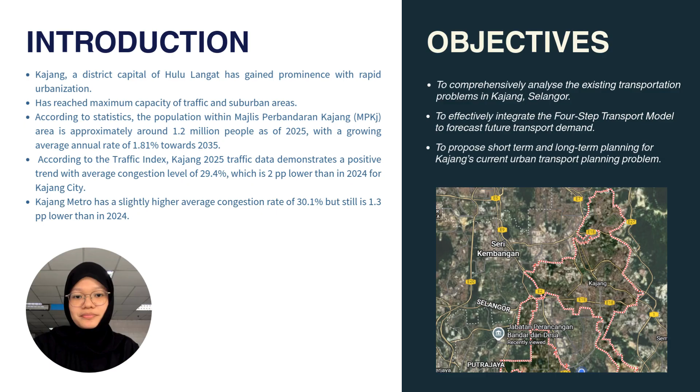There is a lot of public transport infrastructure provided in Kajang, one being the well-known MRT Kajang line, MRT Kajang Stadium. There are also KTM Kajang, Kajang Bus Terminal, and Rapid KL On Demand. There are also MRT feeder buses provided, which are T451, T461, T462, and T463. Currently, Kajang has 4 major expressways that handle both traffic from Kuala Lumpur to Seremban and local dispersal, which are Kajang SILK Highway, Cheras-Kajang Expressway, LEKAS Highway, and Kajang Bypass.

The first identified problem in Kajang is traffic congestion. Kajang experiences a low level of service, especially during peak hours, particularly near the UKM main entrance. Heavy commuter traffic from Bandar Baru Bangi and Kajang town contributes to severe congestion. According to a recent study, 15 intersections in Kajang operate at LOS D to F. Traffic flow is unstable and forced, making congestion the main urban transport issue. The primary cause is closely spaced intersections with poor traffic signal coordination.

The next one is the first and last mile gap. Kajang has a poor first and last mile connection to MRT and KTM stations. Many residents, especially students, still rely on private vehicles to access stations. Unsafe and uncomfortable walking conditions, such as broken pavements, no shade, poor signage, and long walking distances discourage access. On top of that, weather conditions in Malaysia further reduce walkability. Even though feeder buses are provided, they are unreliable due to traffic congestion, making public transport less practical for daily use.

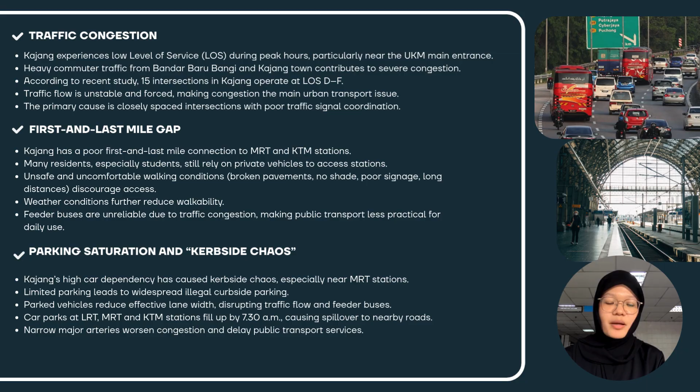The next problem is public transport fragility. The Khazanah Research Institute study shows that despite overall growth, many public transport services face declining ridership. This reflects weakening system performance, pushing commuters back toward private vehicle use. Commuters perceive public transport as functional yet vulnerable, shaped by journey experience, service reliability, and social or environmental conditions.

Frequent disruptions at KTM and MRT stations, such as delays, missing services, and poor information during interruptions, undermine user confidence. Recent KTMB service disruptions, including overhead power line failures between Salak Selatan and Serdang, have repeatedly paralyzed KTM Komuter services to Kajang.

The next one is inelastic microtransit. Rapid On-Demand faces capacity issues despite being designed to solve first and last mile access. The fare increase to RM2 in February 2026 has not reduced demand. Peak hour demand exceeds supply, making rides frequently unavailable. Students and suburban residents such as in UKM, Taman Universiti, and Sungai Ramal depend on this service due to limited bus access and high e-hailing costs. Geofencing limits prevent trips to destinations just outside the service area.

And the last one is pedestrian vulnerability and infrastructure neglect. Kajang hosts a large student population due to institutions such as UKM, GMI, and Kolej Poly-Tech MARA. Most students are non-car owners and are heavily affected by poor road and pedestrian conditions. Discontinuous or missing walkways force students to walk on road shoulders or grass near high-speed traffic.

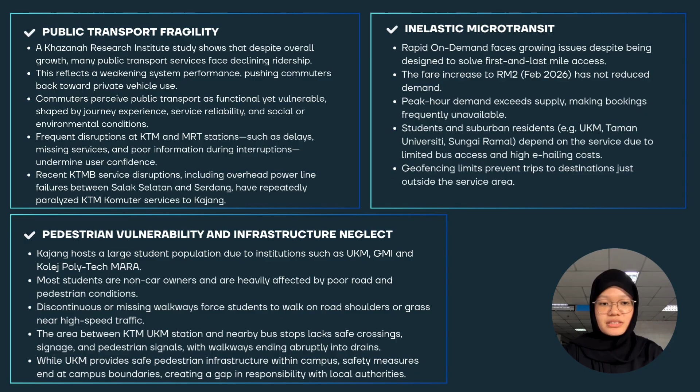The area between the KTM station and nearby bus stops lacks safe crossing signage and pedestrian signals, with walkways ending abruptly into drains. While UKM provides safe pedestrian infrastructure within campus, safety measures end at campus boundaries, creating a gap in responsibility with local authorities.

Next is the transportation plan. First, we are proposing an integrated multimodal transport system. This system will connect various transport modes like MRT, KTM, bus, and micro-mobility options to reduce travel time, ease congestion, and increase accessibility. With a unified fare system and real-time information, the system will make public transport more convenient, reducing reliance on private vehicles.

Next, public transport-oriented development (TOD) focuses on creating mixed-use development around transport hubs such as MRT and KTM stations. By concentrating residential and commercial space near transport nodes, we reduce the need for private vehicles and promote walking and cycling, fostering a more sustainable urban environment.

We are also prioritizing the promotion of non-motorized transport, encouraging walking and cycling, especially for short distance trips. This will reduce congestion, reduce emissions, and improve public health by creating safer and more accessible pedestrian and cycling space.

In line with sustainable goals, we are focusing on low-carbon transport initiatives, expanding the public transport network, promoting electric vehicles, and transitioning public transport to electric or hybrid buses to reduce emissions, improve air quality, and make Kajang greener.

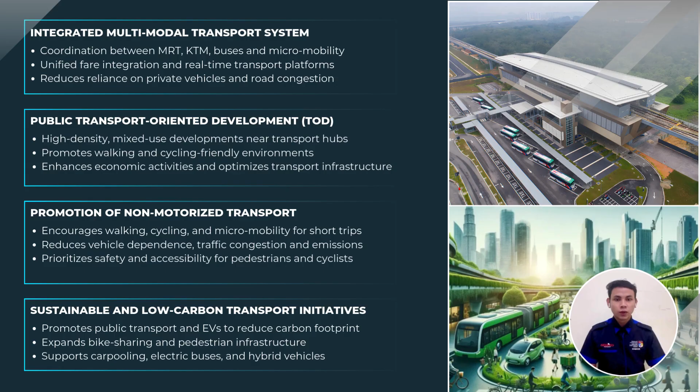Additionally, we will implement a smart and intelligent traffic management framework. Using real-time data, traffic signals will adapt to current conditions, reducing congestion and improving flow, especially during peak hours. Public transport will also be prioritized at key intersections for smoother commuting.

We will also focus on road network optimization and capacity enhancement. Upgrading intersections, expanding roads, and introducing carpooling will improve traffic flow without significant road expansion.

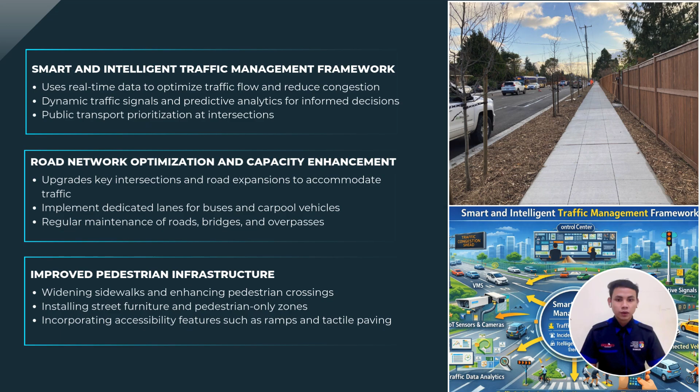Lastly, improve pedestrian infrastructure. Sidewalks will be widened, crossings made safer, and pedestrian-only zones will be introduced. Accessibility features like ramps and tactile paving will ensure Kajang is walkable for everyone.

Next is short-term planning. First, we will focus on MRT and commuter integration. To reduce waiting time and improve reliability, we will increase KTM Komuter frequency, especially during peak hours, and extend operating hours for both MRT and commuter services. We are also improving physical connections between stations and introducing a unified ticketing system, allowing commuters to use one card for both services.

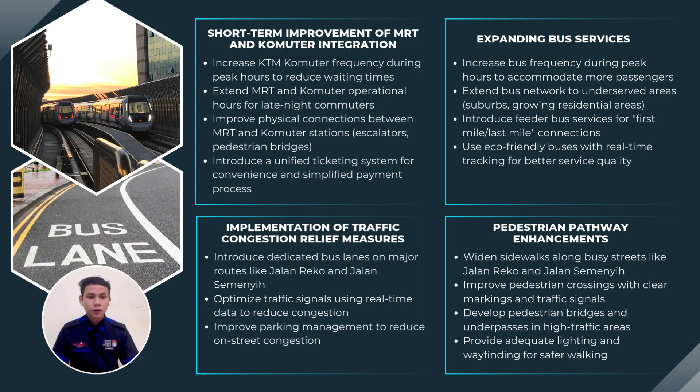In terms of pedestrian infrastructure, we are widening sidewalks and installing safer pedestrian crossings. Pedestrian bridges and underpasses will be developed at key intersections to separate foot traffic from vehicles, ensuring safer and smoother movement.

We are also introducing park and ride facilities near key transport hubs to reduce congestion in the town center. These will be secure and well-lit, and feeder buses will connect park and ride locations to stations, making commuting more convenient.

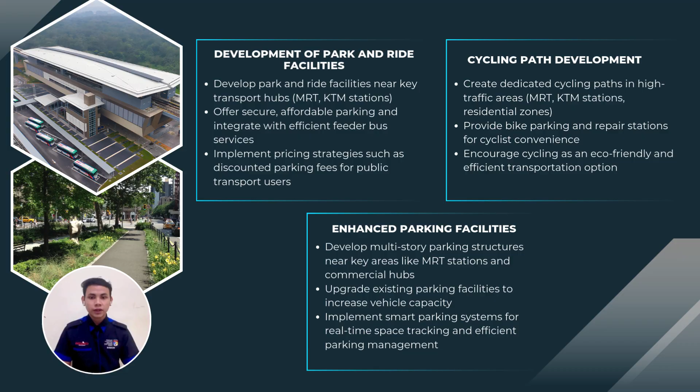Finally, to address parking issues, we will build multi-story parking structures near transport hubs and upgrade existing facilities with smart parking systems, allowing real-time tracking of available spaces and improving efficiency. This initiative aims to reduce congestion, improve accessibility, and promote sustainable mobility in Kajang.

This slide presents the 30-year long-term transportation planning strategy for Kajang. Future transport demand, based on the 4-step transport model, indicates rising trip generation due to population growth, suburban expansion, and major trip generators such as UKM, with strong residential, employment, and education travel flows.

Long-term planning focuses on modal shift towards public transport, walking and cycling, and reassigning traffic from congested routes to public transport and non-motorized networks. For the road network and demand management, the strategy emphasizes optimization of existing routes through selective widening, junction upgrades, and intelligent transport systems, while avoiding excessive road expansion. Long-term car restraint measures such as congestion pricing, parking control, and dynamic pricing are introduced to manage demand.

Public transport forms the backbone of the system, with capacity upgraded to the MRT Kajang line and KTM Komuter, safeguarded corridors for future rail extension, a transition to high-capacity buses and BRT, and full bus-rail integration through ticketing, scheduling, and mobility hubs.

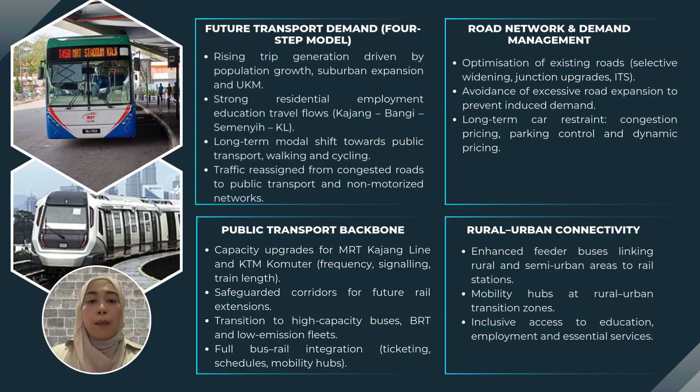Next, rural-urban connectivity is strengthened through enhanced feeder buses linking rural and semi-urban areas to rail stations, supported by mobility hubs at transition zones to ensure inclusive access to education, employment, and essential services. Active transport infrastructure includes a continuous and protected cycling network, secure bicycle parking, pedestrian-friendly streets, shaded walkways, traffic-calmed zones, and safe crossings with universal design.

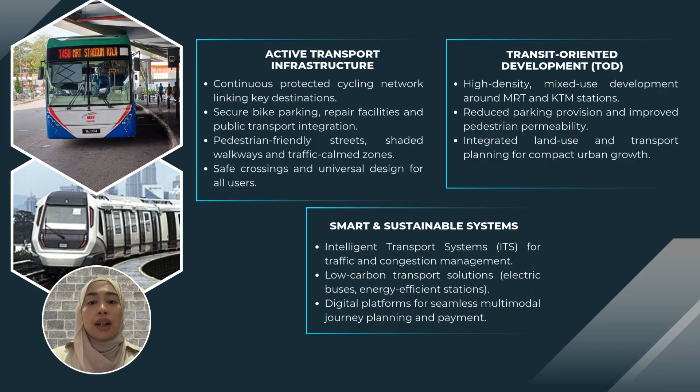Transit-oriented development also focuses on high-density, mixed-use development around MRT and KTM stations, reduced parking provision, and improved pedestrian permeability to support compact urban growth. Finally, smart and sustainable systems include intelligent transport systems for congestion management, low-carbon transport solutions such as electric buses, and digital platforms for seamless multimodal journey planning and payment.

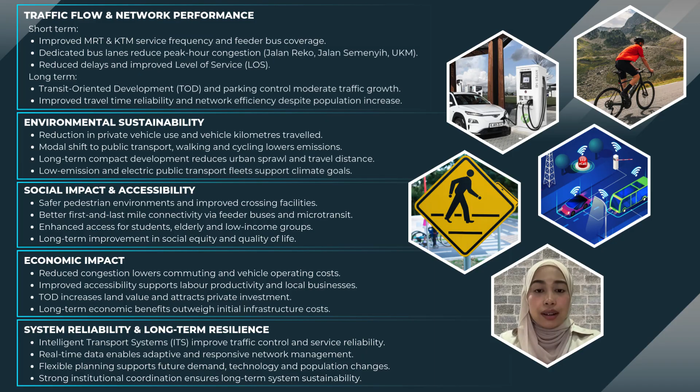Regarding economic impact, reduced congestion, lower commuting and vehicle operating costs, and improved accessibility support labor productivity and local business, and transit-oriented development increases land value and attracts private investment, with long-term benefits outweighing initial costs. Finally, system reliability and long-term resilience are strengthened through intelligent transport systems, real-time data for adaptive network management, flexible planning, and strong institutional coordination.

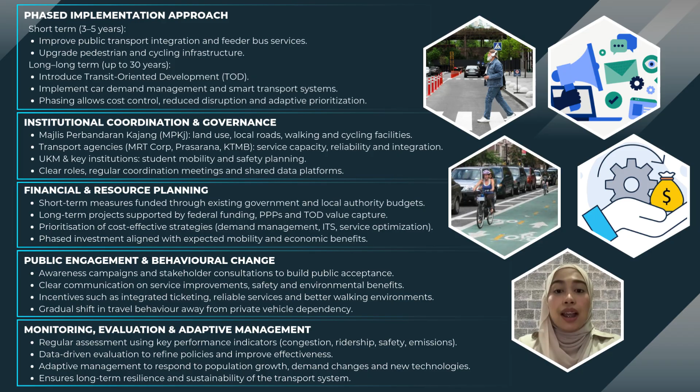In conclusion, Kajang's transportation system faces significant challenges such as traffic congestion, limited public transport options, and pedestrian safety concerns. However, the proposed solutions, including an integrated multimodal transport system, expanded bus service, and improved pedestrian infrastructure, offer immediate relief and enhance accessibility. Long-term plans focused on enhanced public transport capacity, smart traffic management, and rural-urban connectivity will ensure Kajang's transportation system remains resilient as the population continues to grow.

By prioritizing sustainability and environmental goals, this strategy will reduce congestion, improve traffic flow, and contribute to a more efficient, equitable, and eco-friendly urban transport system. The overall goal is to create a transportation network that meets the needs of Kajang residents while improving their quality of life.